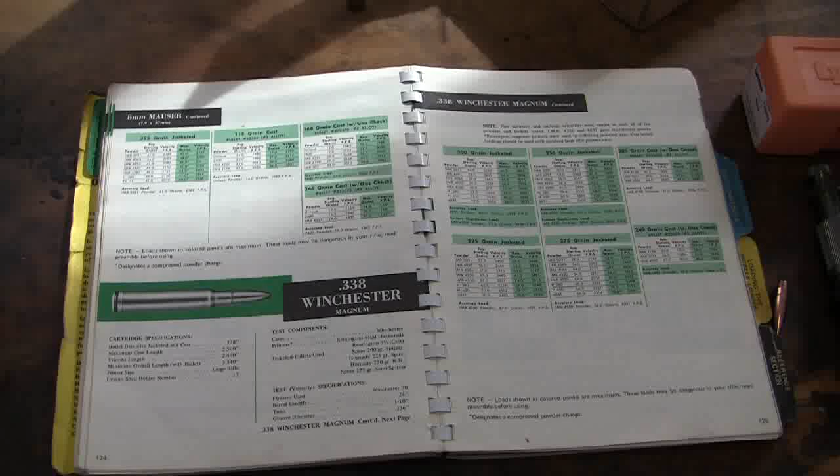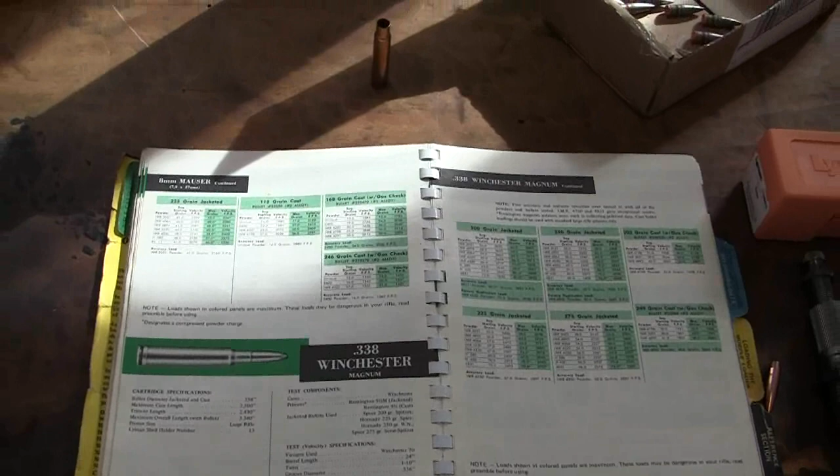We're going to reload a cast bullet for the 8mm Mauser, or the 7.9 by 57mm. Basically, we're doing this with the 88 commission rifle in mind, but these loads probably could be used in a K98 as like a light plinking load.

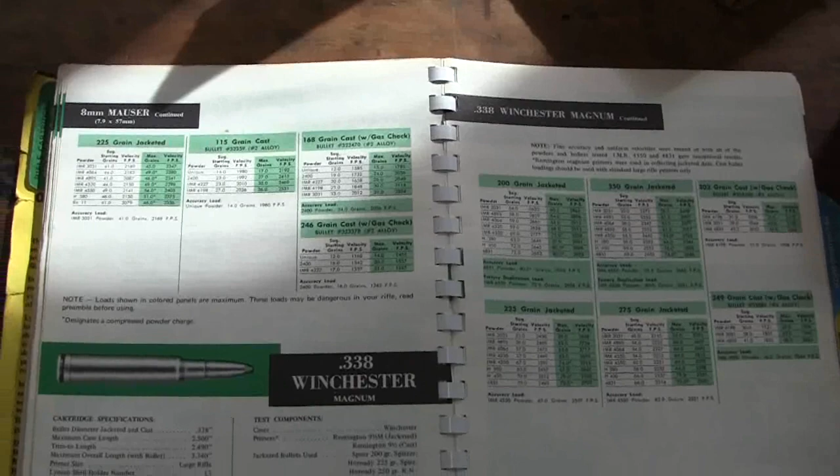So we got the bullet. We decided we're going to use that pointed bullet, which I've never shot. Lyman discontinued the mold, which either they didn't sell or they don't work well. I'm not quite sure, but we're going to find out here in a little bit.

It kind of helps to have a library of older reloading manuals. I have the 45th edition Lyman Reloading Handbook. And so we find something close. We find a 168 grain cast bullet load. And I decided to use IMR's 2400 powder.

Why I decided this is there's loads for Unique, but on most of them, they say this is the most accurate load. If you look down there on the panel, it says accuracy load. It's 2400. So I'm going to give it a try. I've never used it before. I've used Unique with cast rifle bullets and it works out okay.

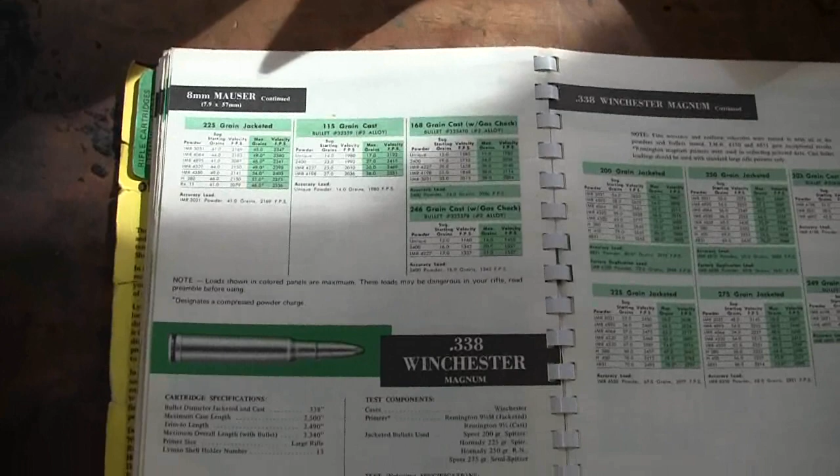So we got our bullet. We got our powder. We got some sort of load data here, which is not exact. The bullets are weighing in, I checked them on a scale, we can double check them again. But check your bullets after they're lubed, sized, finished, ready to reload. Then check your weight and the consistency on it. We're going to see here what we're getting.

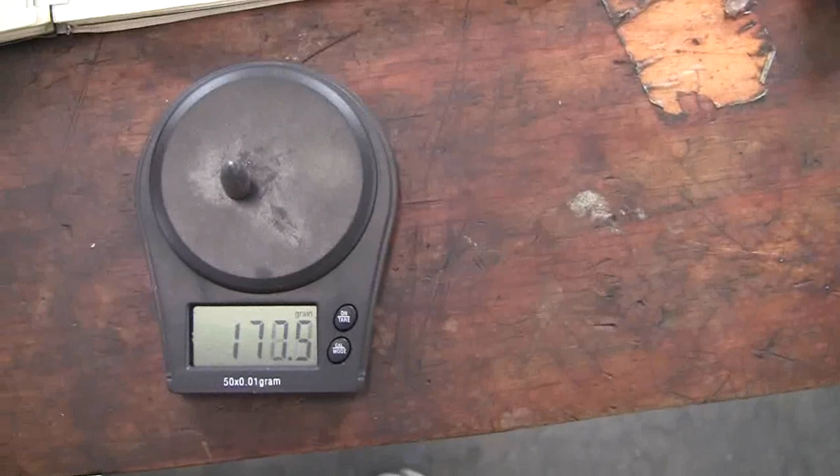We got our cast bullet. And we go over here and make up a sheet, and what we're going to do is take the low end of the load, start with that, and go up to the high end in 1 grain increments. And then we check with the chronograph to see if this data comes out.

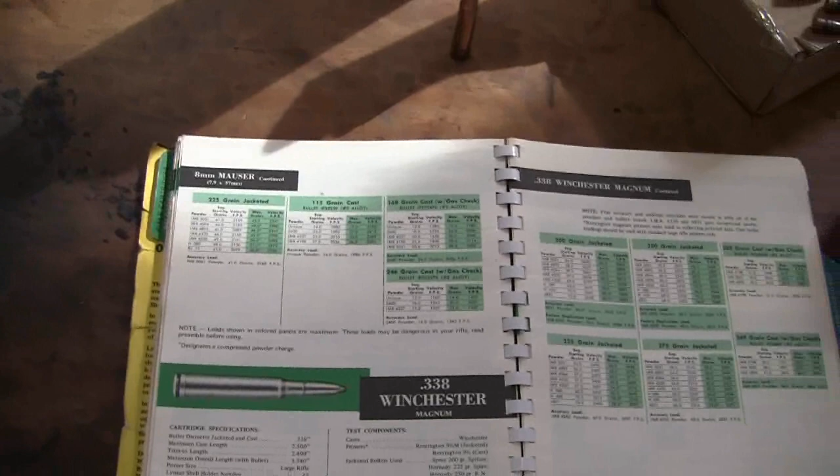Now sometimes it's right on, but most of the time I found it's not that hot. But I did have a load where I started off with the suggested starting load and got the max velocity. If something like that happens, stop, pull the ammunition apart. That's all you got to do. Alright, so we got our powder, we got our bullet, we've got a load data sheet, and we're going to run this all against the chronograph and test it for accuracy.

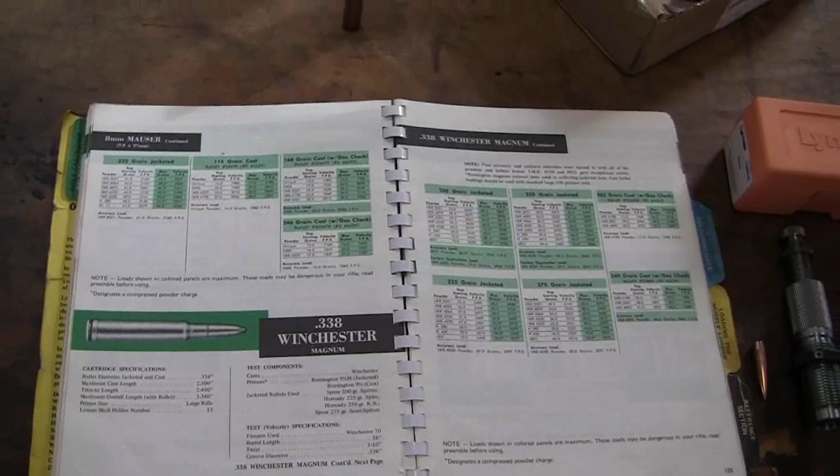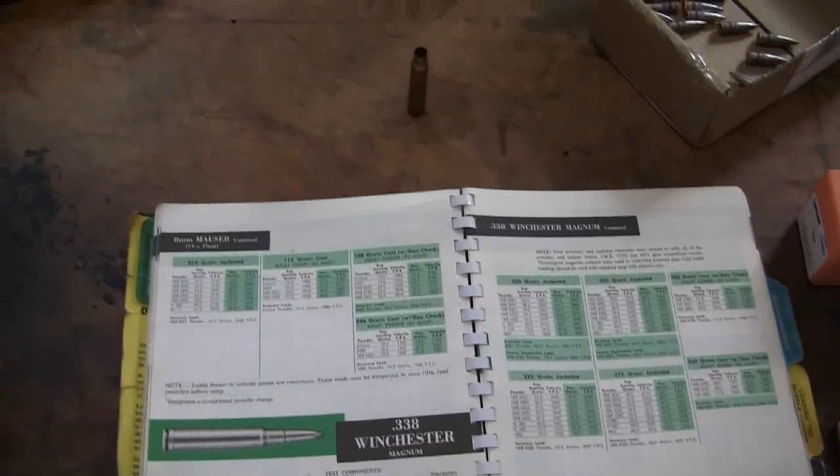Now you reload cast bullets. The only thing that's going to be different with a cast bullet load other than a regular jacketed bullet load is you're going to have to open up the throat a little bit and expand it. And you're going to have to get an expansion die. Usually with cast bullets and handguns you'll do this, but you have to do it with rifles. You have to open the neck of the case up a little bit so the cast bullet fits in there.

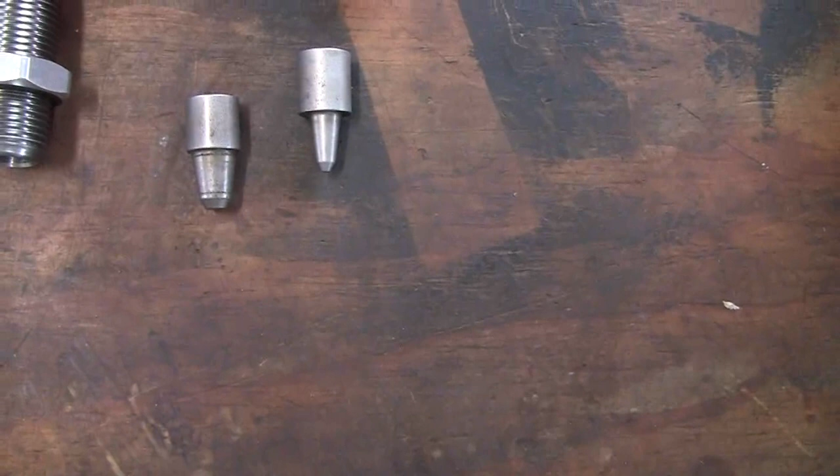We have the Lee Universal Case Expanding Die. Basically it gives you a chart how to load it, and it just has a tapered plug that you run up the case, and it'll gently flare the case out to allow the cast bullet. I'll show you what I mean by that. But this here is kind of sharp. It's universal. I've used it on several different calibers. It's kind of okay, but it's a little aggressive in the flare.

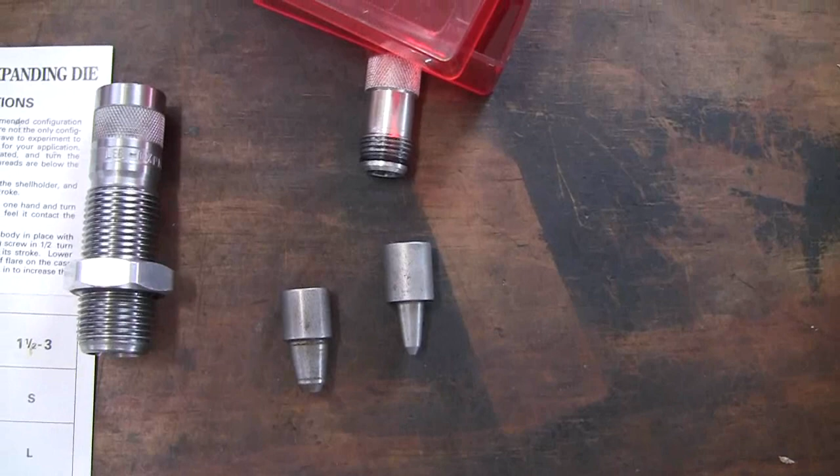But it is universal, and you can use it with different calibers, different types. You only have to buy one setup. Whereas for the 8mm, I have a Lyman 8mm M die, neck expanding die. And this is specifically made for the 8mm. I'm going to set this camera up and we'll take a look at this stuff here.

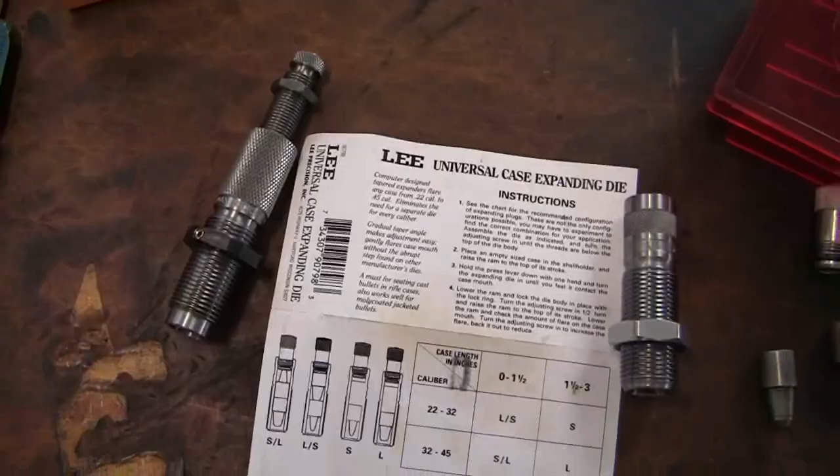Okay, I have this apart. Now this is specifically made for 8mm Mauser. You can't really use it for anything else because this shaft has a very mild taper, and when this is seated down in here and you run the case up, see this one hasn't been run in there, it expands the case out a little, and this has a very, very mild step in there. So when the case goes up in there, can't get that one up in there either. What it does is it just basically expands, hold on a second.